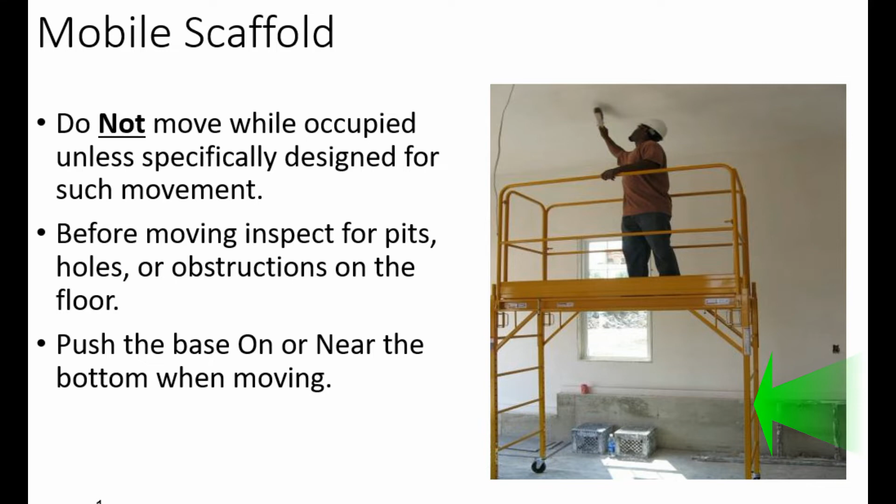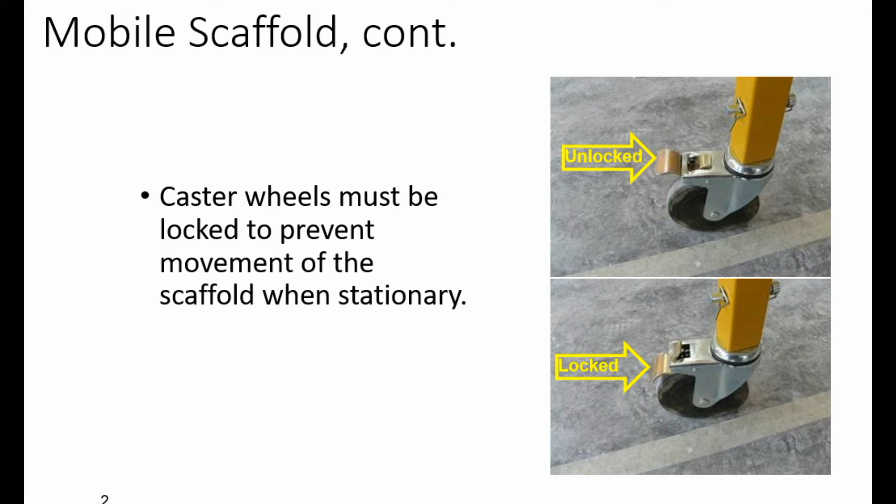Caster wheels must be locked to prevent movement of the scaffold when it's stationary. So when you're going to move it, unlock the wheels, move it, and then lock them all back down. All 4 wheels. Unless it has more, lock all the wheels back down.

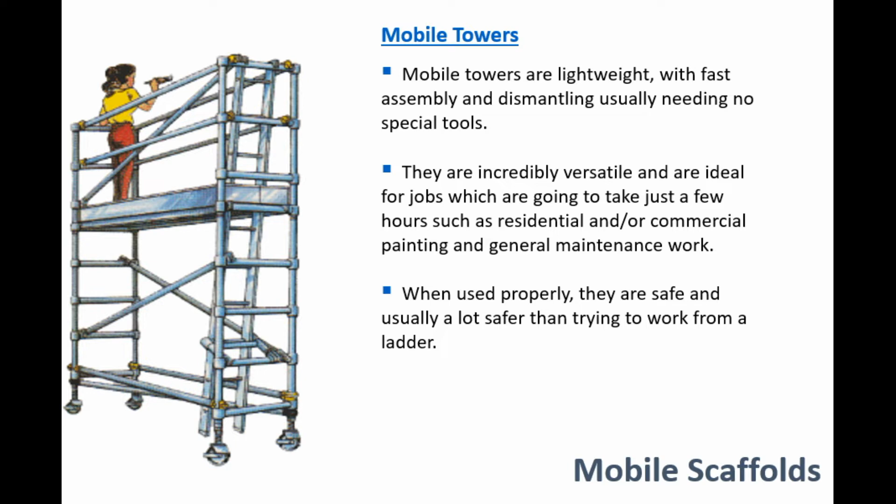Mobile towers are lightweight with fast assembly and dismantling, usually needing no special tools. They're incredibly versatile and are ideal for jobs which take just a few hours, such as residential or commercial painting and general maintenance work. When used properly, they are safe and usually a lot safer than trying to work from a ladder, obviously because they give you a platform to walk on.

Scaffold casters and wheels shall be locked with positive wheel and swivel locks or equivalent means to prevent movement of the scaffold while it is used in a stationary manner. Where leveling of the scaffold is necessary, screw jacks or equivalent means shall be used. Caster stems and wheel stems shall be pinned or otherwise secured in scaffolding legs or adjustment screws.

Manual force used to move the scaffolding shall be applied as close to the base as practicable, but not more than 5 feet above the supporting surface. Power systems used to propel mobile scaffolds shall be designed for such use. Forklifts, trucks, similar motor vehicles, or add-on motors shall not be used to propel scaffolds unless the scaffold is designed for such propulsion systems. Scaffolds shall always be stabilized to prevent tipping during movement.

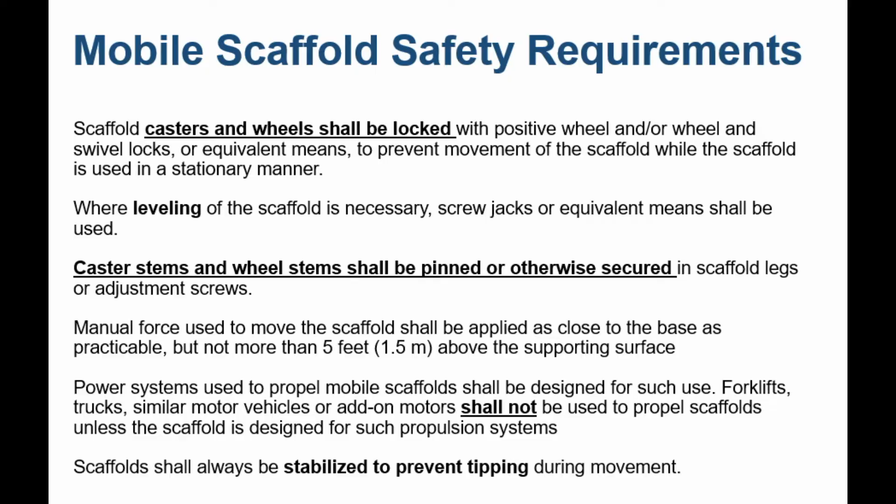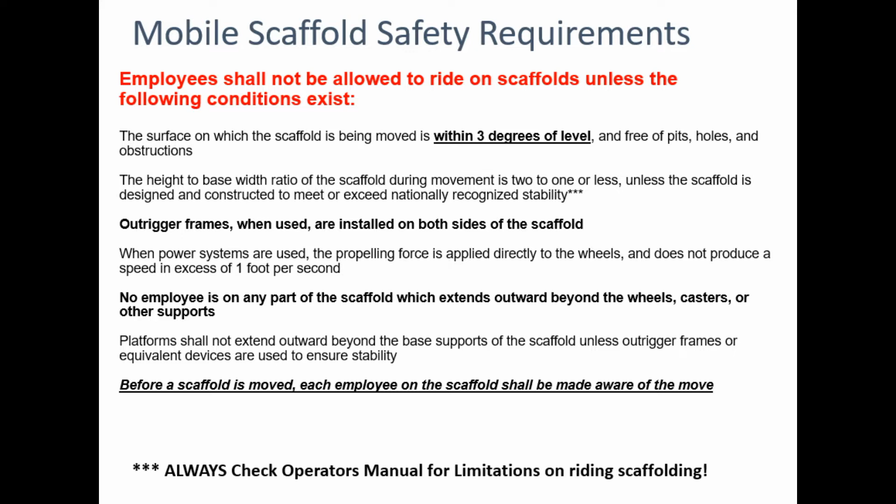Now, I do not train my companies to move scaffolding with employees on it. I tell them always come down, but feel free to take a picture of this slide if that is something your company allows you to do. In my experience and the situations I've been put in, I've never seen a place where it was safer to just move the scaffolding with an employee on it. So I tell my people, come down, move the scaffolding, get back up.

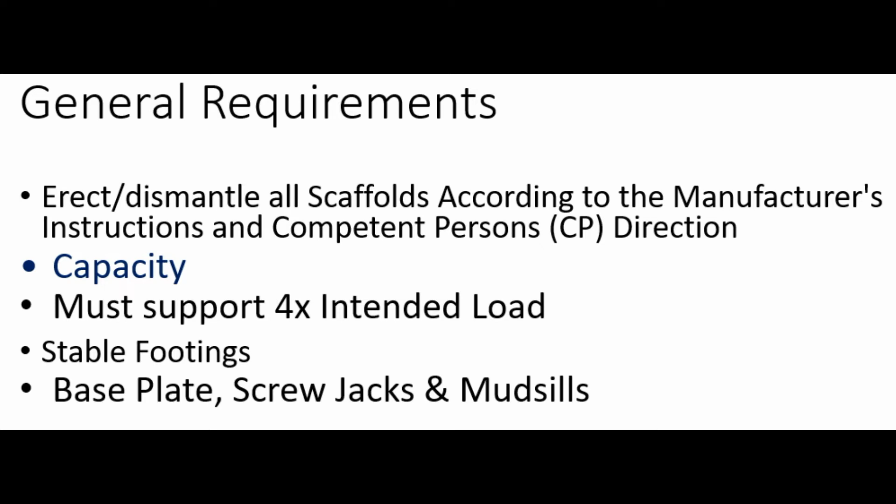Erect and dismantle all scaffolding according to the manufacturer's instructions and the competent person's direction. Capacity must be 4 times the intended load, and it must have stable footings, including a base plate, screw jacks, and mudsills. Platforms must be at least 18 inches wide, except for a ladder jack, pump jack, top plate, or roof brackets, which can be 12 inches wide. The front edge of all platforms must be within 14 inches of the face of the work.

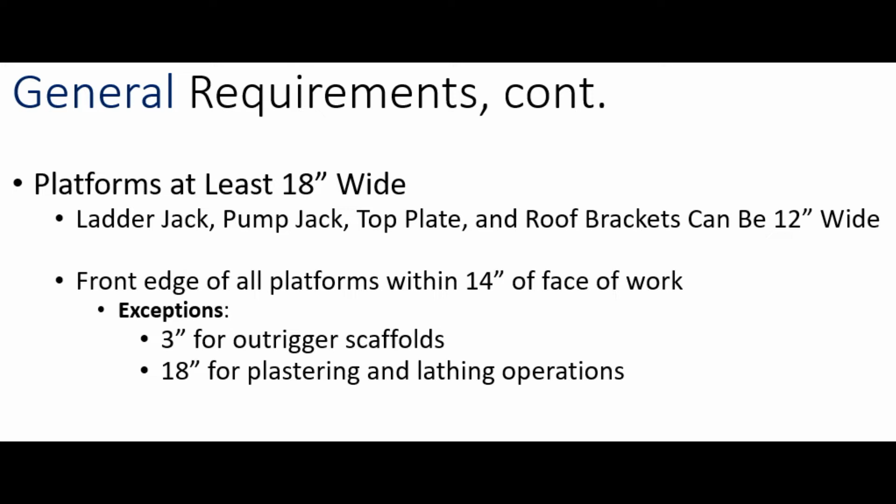Now I'll show you a picture where I explain this better, but there are some exceptions as well. That's 3 inches for an outrigger scaffolding and 18 inches for plastering and lathing operations. Those have exceptions, but for most scaffolding, it must be 14 inches or less to the face of work.

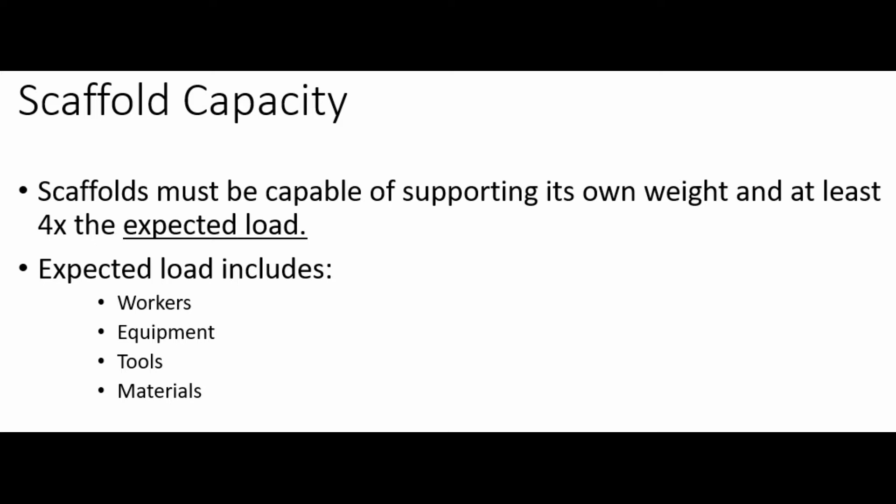Scaffolding must be capable of supporting its own weight and at least 4 times the expected load. This includes workers, equipment, tools, materials, anything and everything on those legs of the scaffold. Some quick math: 400 pounds of workers, that's 2 people, plus 100 pounds of tools, plus 100 pounds of materials, that's 600 pounds, times 4, the intended load, equals 2,400 pounds, or a small car.

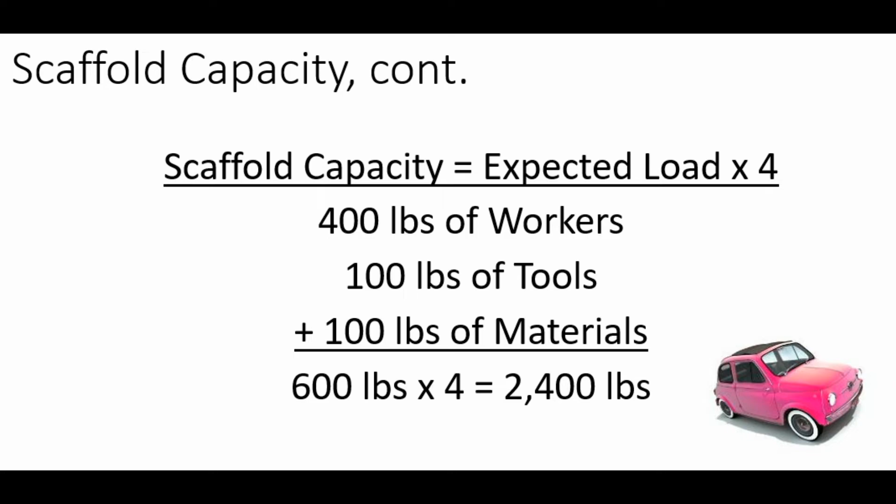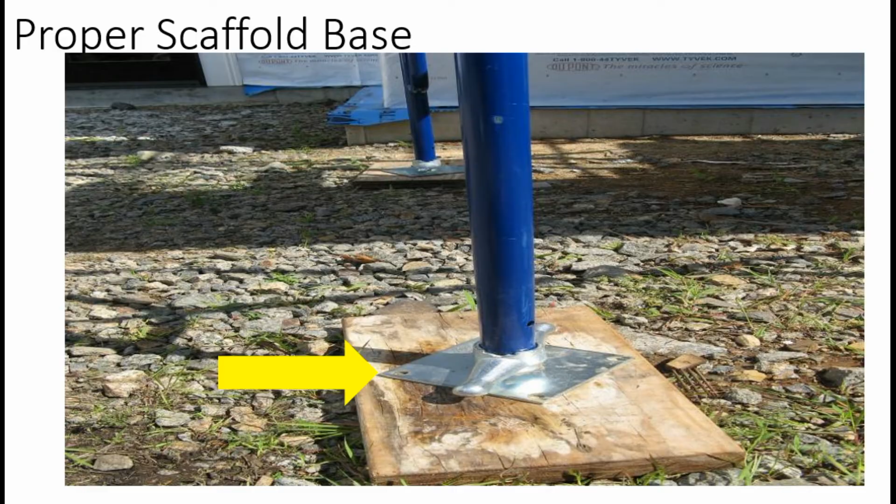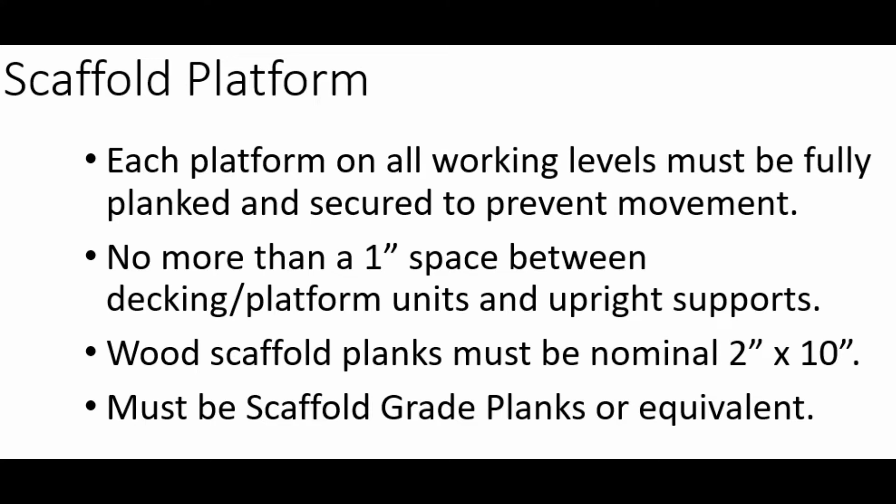Each platform on all working levels must be fully planked and secured to prevent movement. No more than 1 inch space between decking platform units and upright supports. Wood scaffolding planks must be a nominal 2 inches by 10 inches and must be scaffolding grade planks or equivalent.

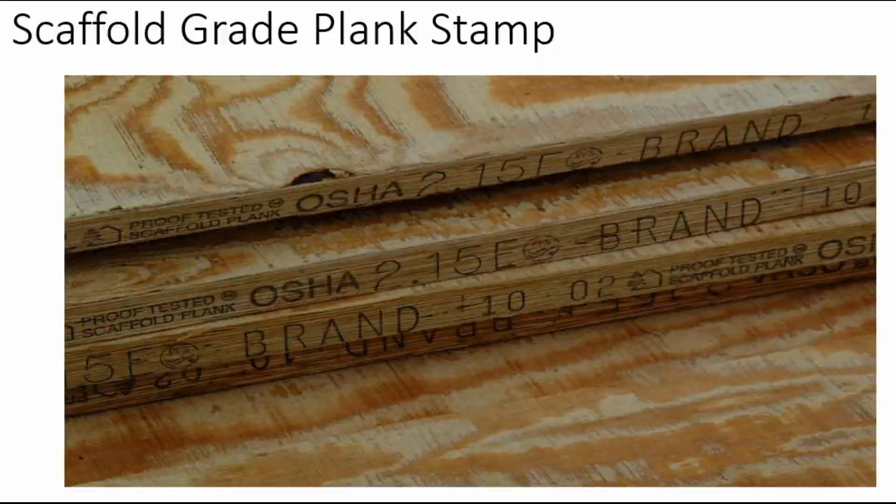So if you're climbing up on the scaffolding and you see Home Depot lumber, no go. It must be scaffolding grade plank, and it must be in good condition. Planks with visible defects must not be used.

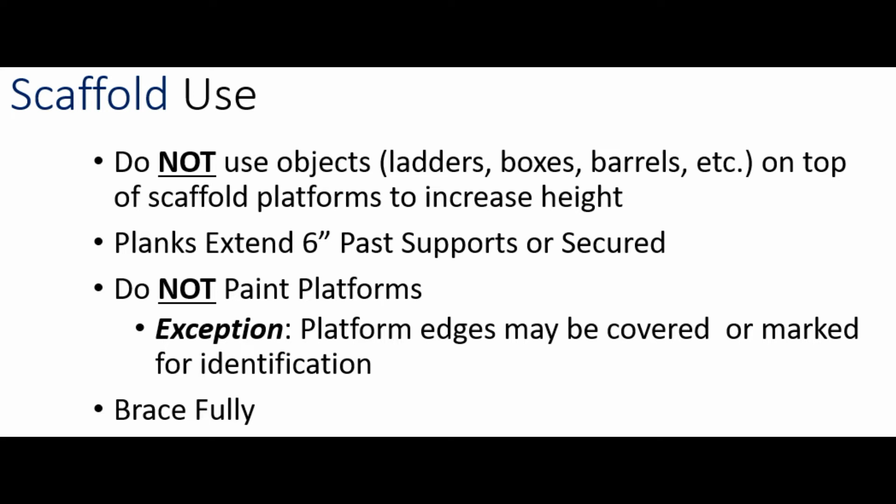Do not use objects such as ladders, boxes, or barrels on top of scaffolding planks to increase height. Planks must extend 6 inches past supports or be secured. Do not paint platforms; the only exception is edges may be covered or marked for identification. Scaffolds must be fully braced. Remember I told you I'd show you a picture of the 14 inches to the face?

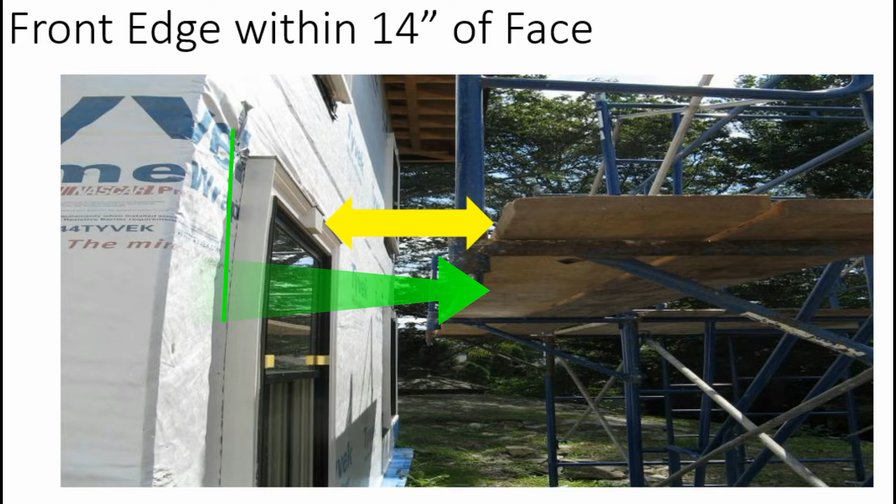That is from the edge of the work to where the person's foot is, from this piece of wood where they can step. 14 inches or less.

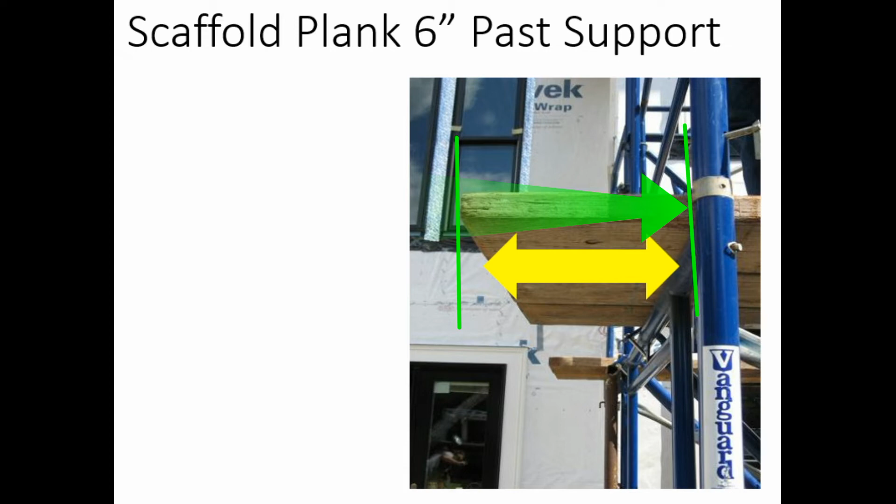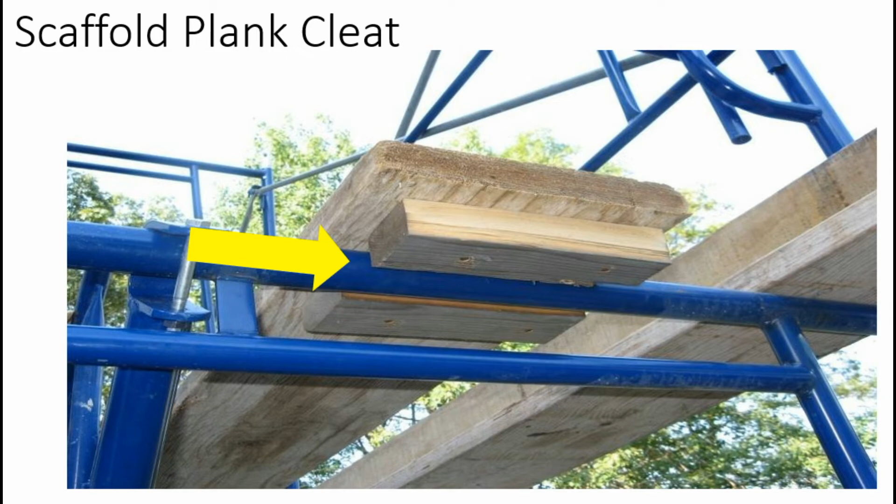Planks should extend at least 6 inches past the support. So the edge of this piece of wood has to be at least 6 inches from the last base where it landed, or secured. Cleating is a popular form of securing it. I've also seen them wrap tie wire around it. There are many different ways to secure it. Securing is all about keeping the plank from sliding off the scaffolding. When it says fully braced, it's talking about these cross members right here.

A designated competent person, designated by the employer, has the knowledge and experience required to identify existing and predictable hazards, has authority to eliminate unsafe working conditions, and has the authority to stop work if unsafe conditions exist.

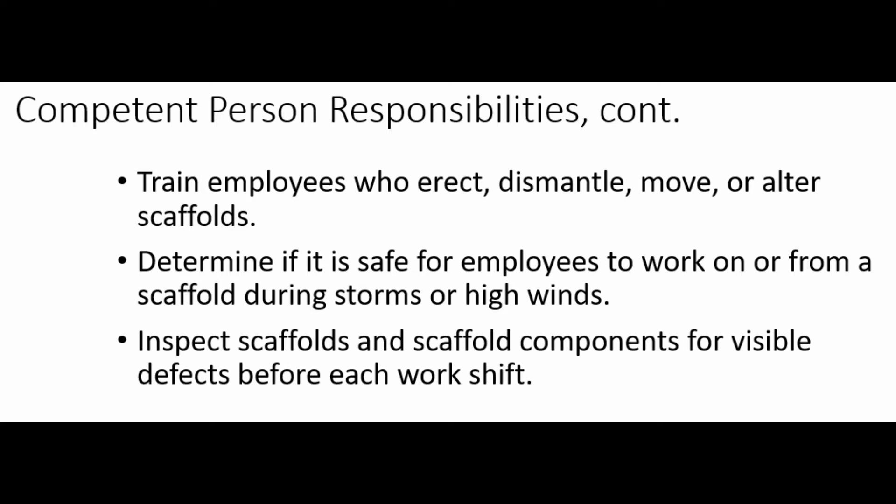The competent person shall train employees who erect, dismantle, move, or alter scaffolds. This video is not training anybody to build scaffolding. They will also determine if it is safe for employees to work on or from a scaffold during storms or high winds, and inspect scaffolds and scaffolding components for visible defects before each work shift.

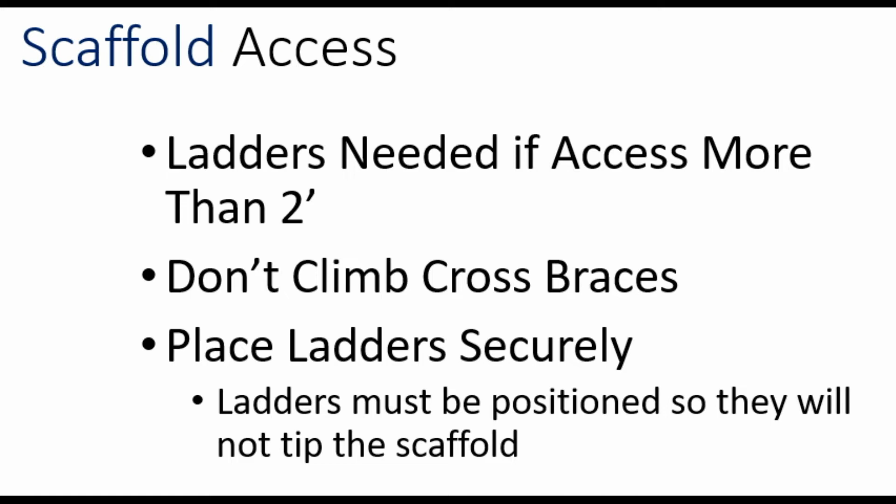Scaffolding access: ladders are needed if access is more than 2 feet high. Don't climb cross braces, and place ladders securely. Ladders must be positioned so they will not tip the scaffold.

Access to or from another surface, such as a window, can only be used when the scaffolding is not more than 14 inches horizontally and not more than 24 inches vertically from the other surface.

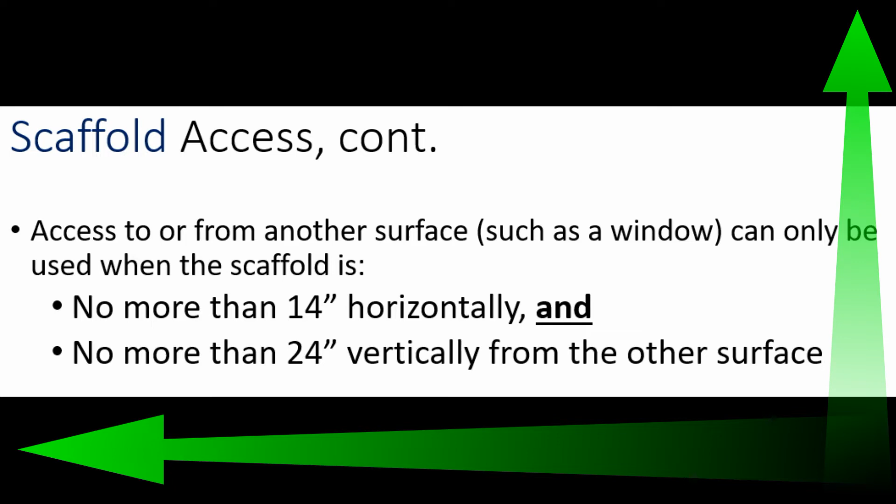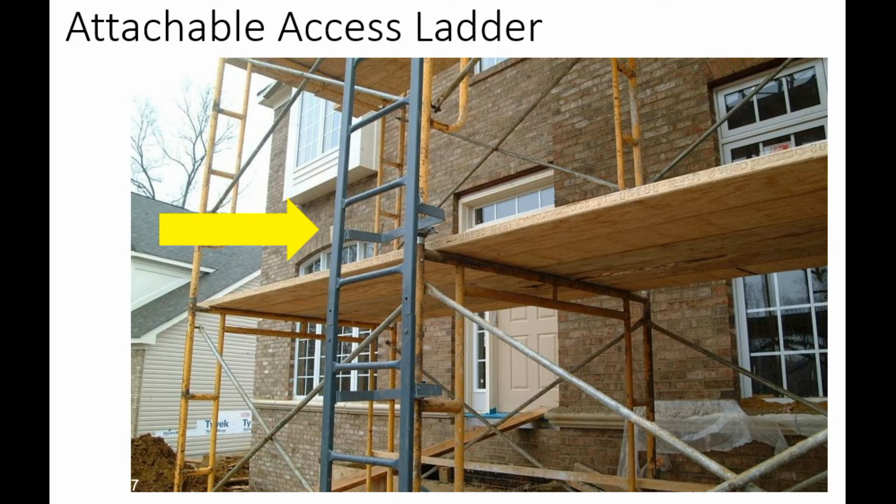Portable ladders must be secured to prevent displacement and extend at least 3 feet above the landing to provide a handhold. This is an attachable access ladder versus a portable ladder like we just talked about. The other way to access would be a stairwell.

Scaffolding 10 feet or higher must have some means of fall protection, guardrails, or a personal fall arrest system. Top rails must be installed between 38 inches and 45 inches high. Mid rails go halfway between the top rail and the platform.

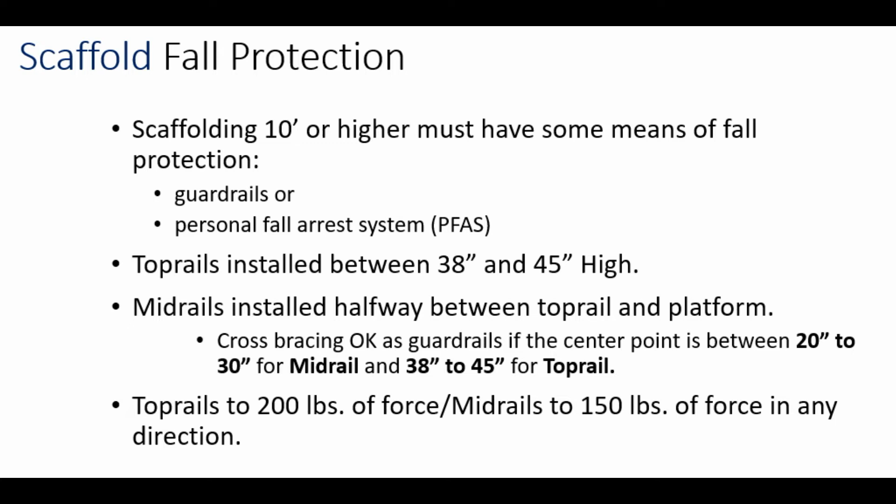Cross bracing is okay as guardrails if the center point is between 20 inches and 30 inches for the mid rail, and 38 inches and 45 inches for the top rail. Top rails must be rated at 200 pounds of force, and mid rails must be rated at 150 pounds of force in any direction. Erection and dismantling.

Fall protection should be used when feasible, when it does not create a greater hazard. The competent person determines feasibility and safety of providing fall protection. Again, this video is not training anybody to build or break down scaffolding, thus this shouldn't be an issue.

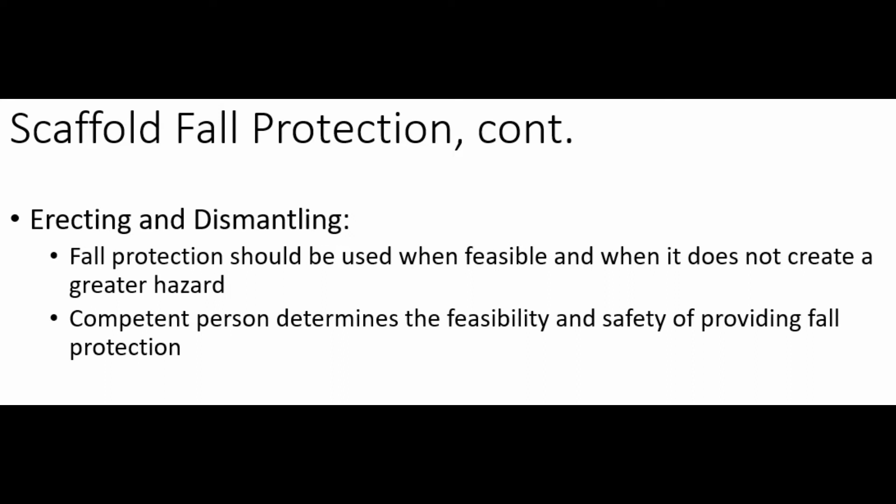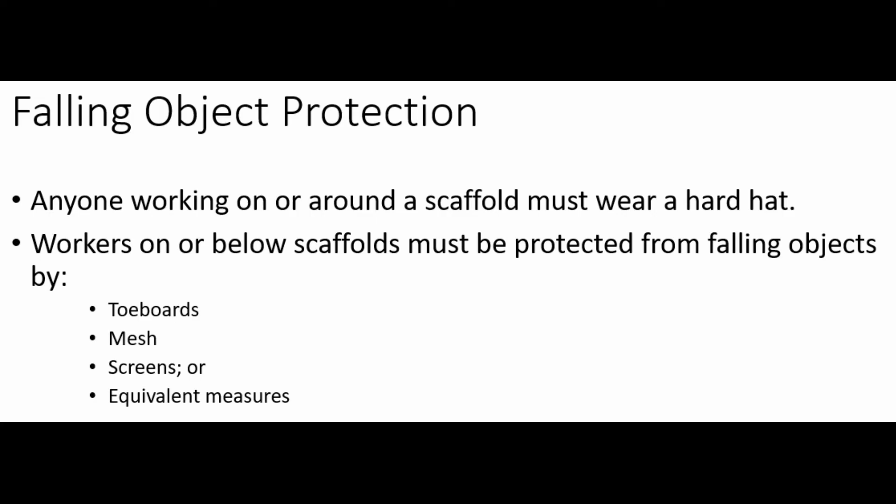A qualified person must conduct the training, which must include the following: electrical hazards, fall protection, falling object protection, proper use, material handling, and load carrying capacities.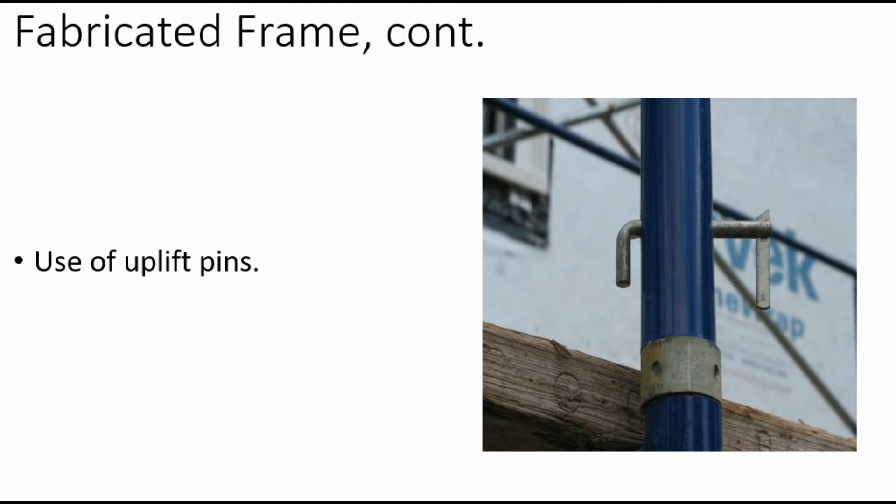They've got to be whatever the manufacturer designed to be in these holes; that's what goes in these holes. Supported scaffolds with a height to base width ratio, including the outrigger supports if they're used, of more than 4:1 must be restrained from tipping by guying, tying, bracing, or equivalent means.

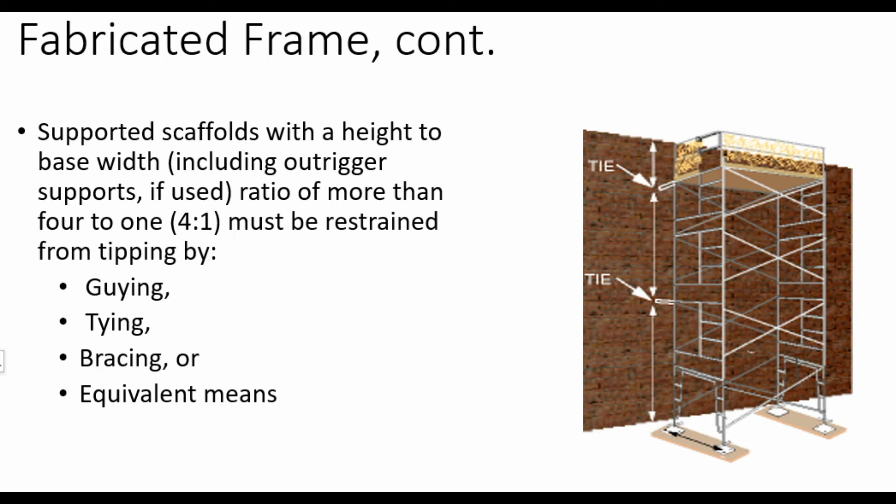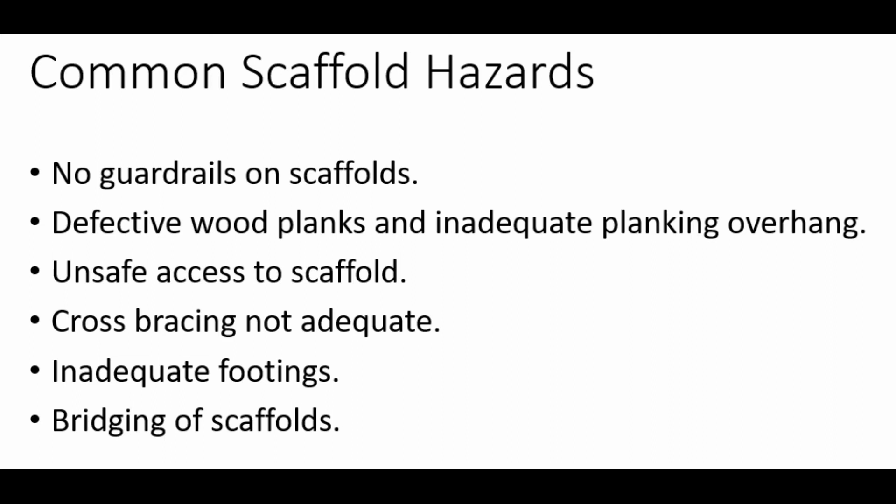The most common scaffolding hazards are no guardrails on the scaffolds, defective planks or inadequate planking, unsafe access to scaffolding, cross bracing not adequate, inadequate footings, and bridging of scaffolds, meaning you're going from one scaffold to the next, so that's that bridging going from A to B.

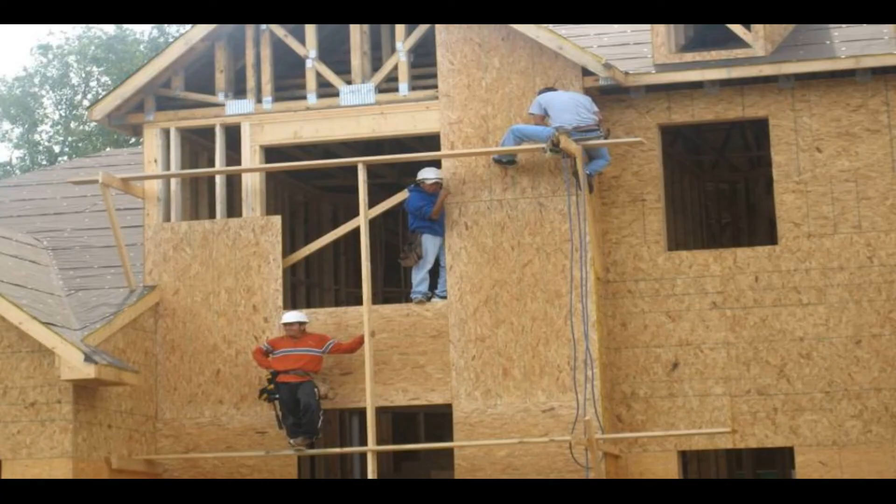Moral of the story is, when scaffolding goes wrong, it's not just the people on it that can get hurt, but anybody in the vicinity can get hurt. And if you're getting hurt from this, it's going to be a bad hurt. Chances are you ain't going to just walk this one off. So let's take a look at some people that have entered into the stupid zone. Fail, fail, fail, fail. All of this is stupid. This one's a little better, but let's take a look.

I've got scrap wire just sitting there, and we never work directly above or below anyone else. The only exception to this is when y'all are on the same team, specifically when you're pulling wire or you're handing materials up. That's okay because you're on the same team doing the same thing. You've got a gap back here in the planking that's larger than 1 inch. And over here, that looks bigger than 1 inch as well.

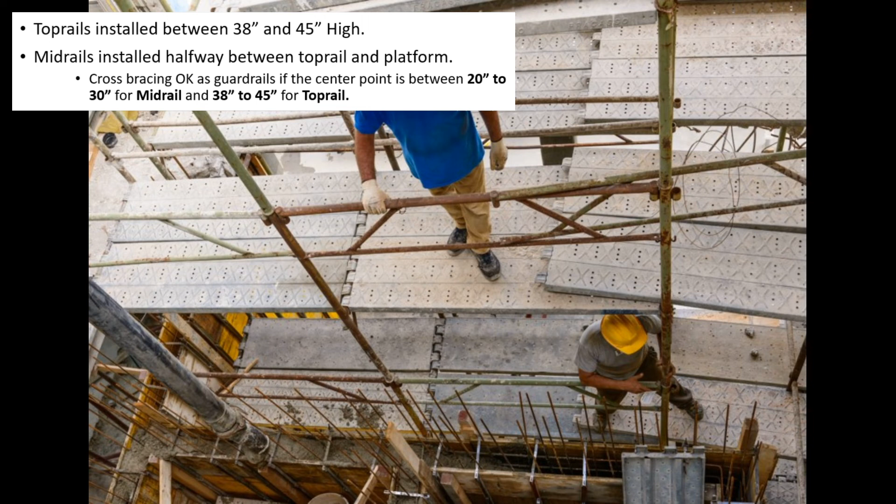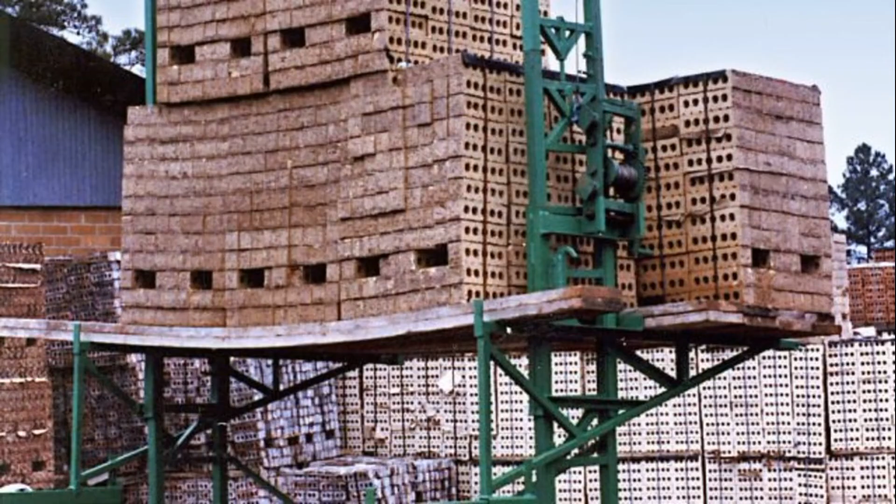This mid and lower rail section do not look like they're actually secured here; it looks loose. But overall, that doesn't even look like it hits that 38 inch to 45 inch target zone. Granted, we are at an awkward angle looking at this, so I would need to pull out my tape measure, but my hunch is this is no good. Does anyone think these are actually scaffolding grade planks? Or does this look like the masonry guys just threw together a scaffold? This is clearly overloading a scaffolding. If this happens, stay off and stay out of the area.

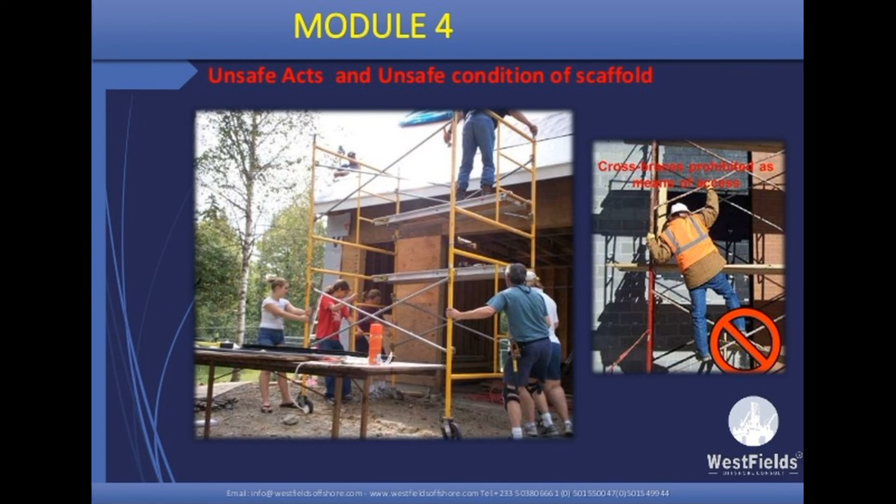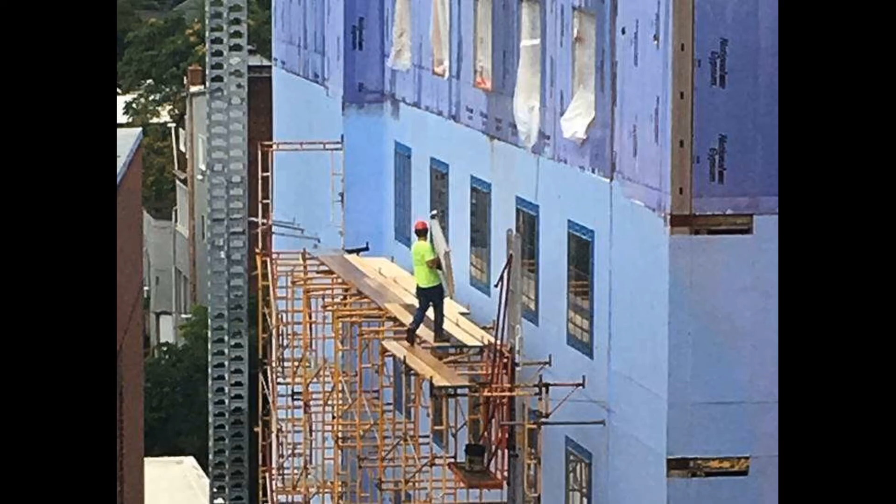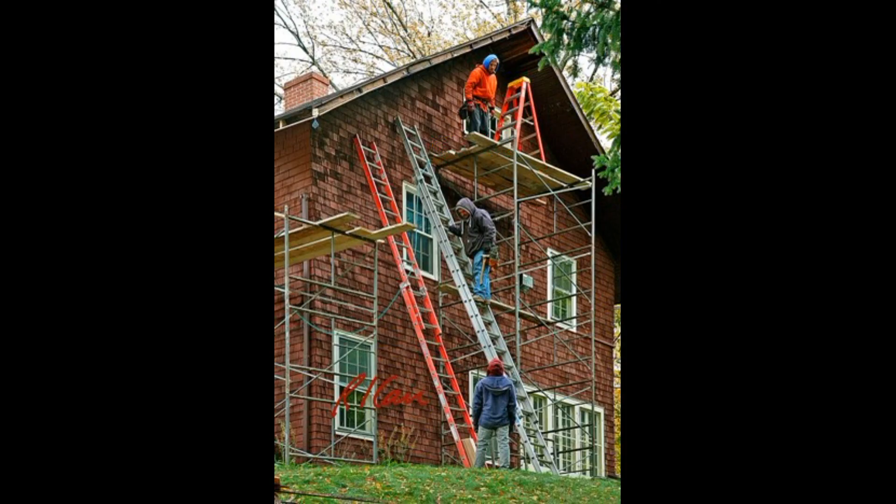No. Everything about this is no. This human being is crazy. You need some fall protection. And then, look at all the different colors of all that planking. Does anyone think that that's actually scaffolding planking? Or is this dude just grabbing any kind of lumber and chunking it up there? That is definitely not 6 inches extended out. He is trying to gain height on the platform, which is again another no-no. We never use ladders on top of scaffolding. Absolutely no form of fall protection, fall prevention. There are more issues, but that's enough to shut this scaffolding down.

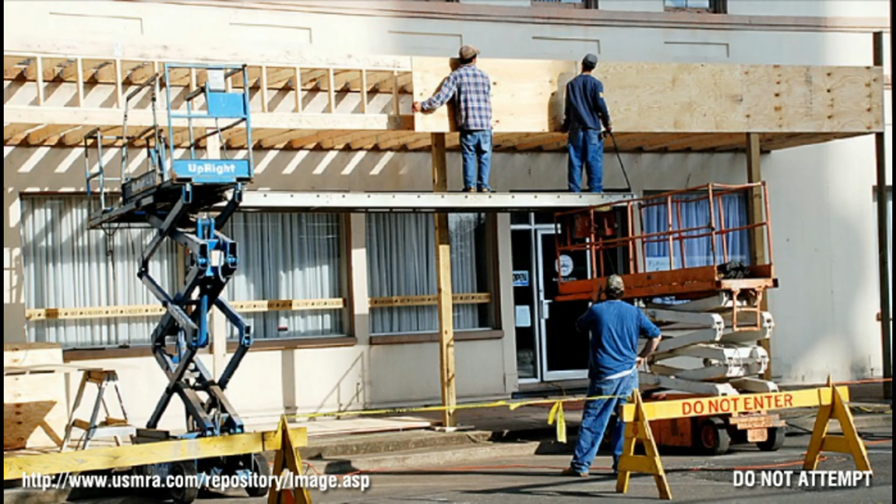And finally, my favorite one. Cable tray is not designed to be used that way. What is the load rating of this cable tray? This scissor lift is holding up structure in which the handrails are only designed for 200 pounds of downward force. This handrail set over here is holding up 2 human beings plus a cable tray, not designed to be used as a scaffold, and that's why it's under the scaffolding section.

No fall protection, fall prevention of any kind while they're up there. And on top of it, scissor lift chain uninstalled, scissor lift chain uninstalled, which are both violations of manufacturer's recommendations, and nobody has a hard hat on. Everyone gets fired. If you have any questions regarding scaffolding on your job site, please talk to the competent person for your company that's in charge of you in regards to scaffolding.